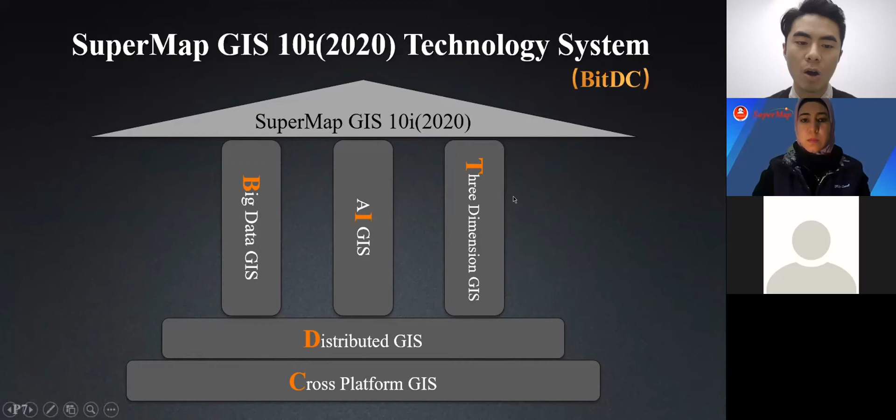We describe our technology as BitDC, which is Big Data GIS, AI GIS, 3D GIS, and distributed and cross-platform GIS. In the future you will learn them one by one, but today let's start with the introduction of SuperMap GIS and its application in civil and environmental engineering.

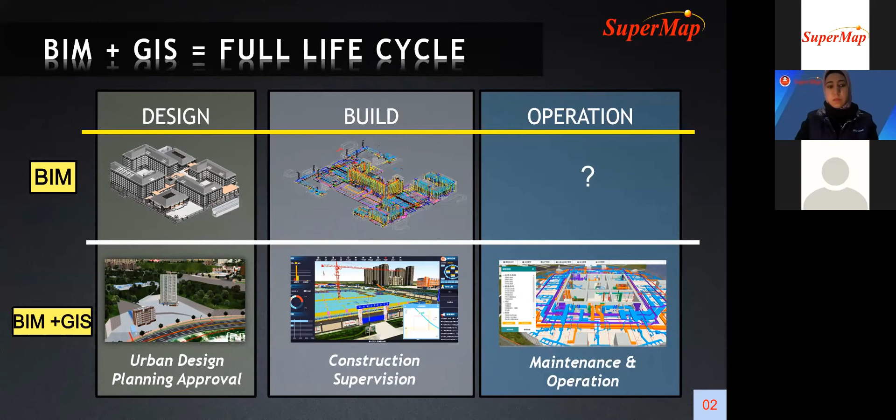One of the important advantages of BIM plus GIS is that in the GIS environment, BIM can merge with multi-source data, such as integrating vector data with BIM, terrain with BIM, oblique photography with BIM, video plus BIM, and street view with BIM.

Also, for other kinds of data like field data, terrain, point cloud, pipeline, and water effect data—all of them in GIS software are in the same format, which is a spatial 3D model, and the format is S3M.

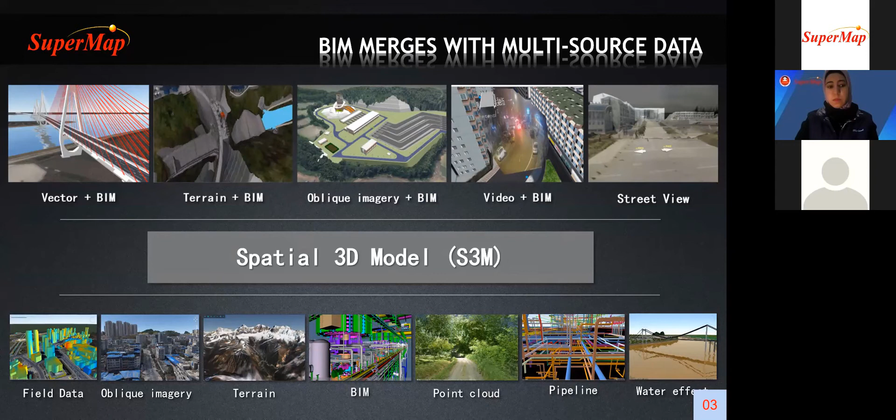GIS can bring other benefits to BIM. For the model, GIS can bring BIM from micro to macro, and also we can focus more on outdoor from indoor.

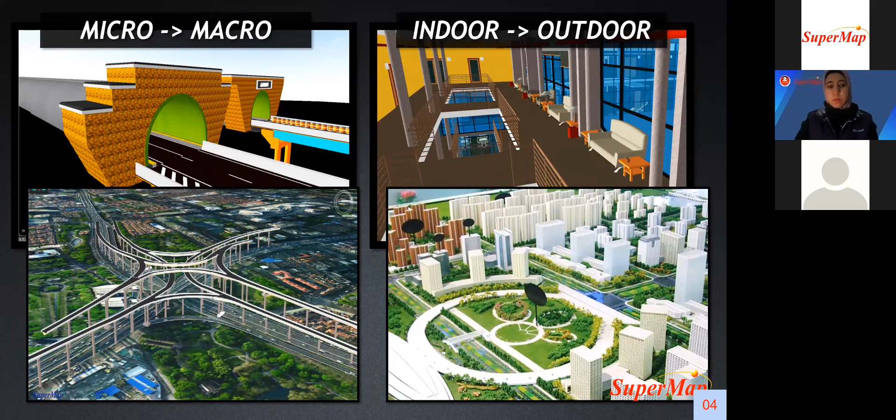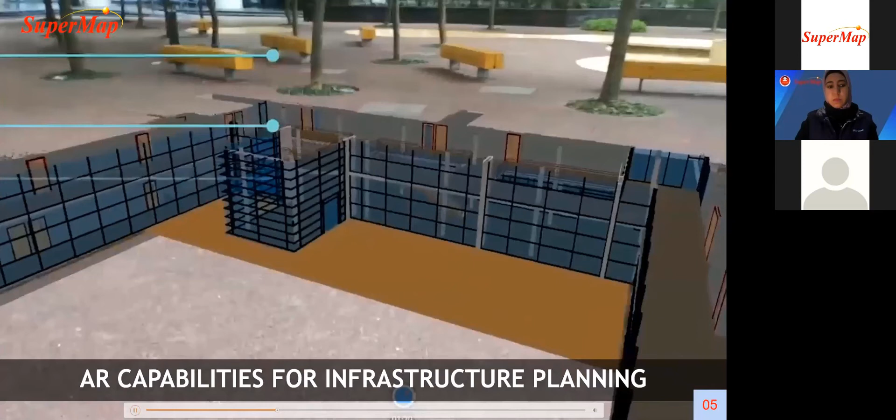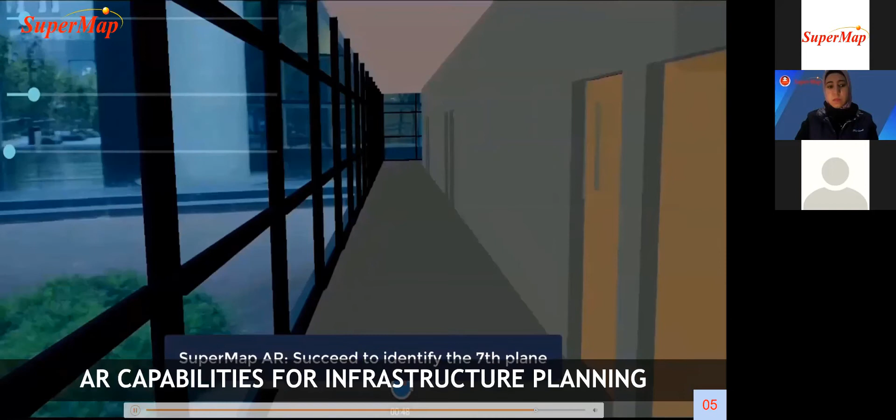There's another application based on BIM and GIS, which is based on AR—that is, AR capabilities for infrastructure planning. Through our mobile camera, we can put the BIM model on the ground or on the table, and we can even go inside the BIM model to take a look at the indoor environment.

For other functions, such as 3D spatial relations, after we input the BIM model into the GIS environment, a lot of functions can be achieved, such as querying objects according to query conditions, which include contain, within, disjoint, intersect, and so on.

Based on one 3D feature, we can do buffer analysis and achieve spatial query analysis, and then get the surrounding features, or other features that have a relationship with our object.

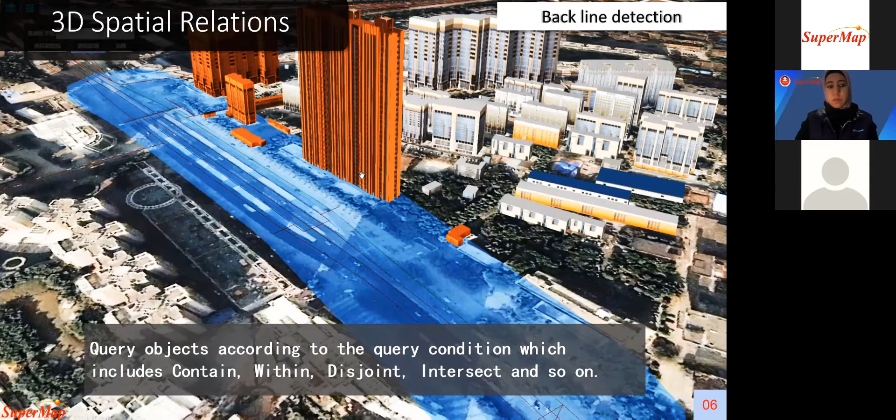Another one is BIM empowering urban planning and construction management. We can put the BIM into a 3D scene and achieve component query, statistical query, and also simulate the construction process.

Because the BIM model is detailed enough, and every component in one BIM building is independent—every door, every wall, every window—we can get all the attributes for every single component. Based on the visibility management function, we can simulate and achieve the construction process simulation function in a GIS environment.

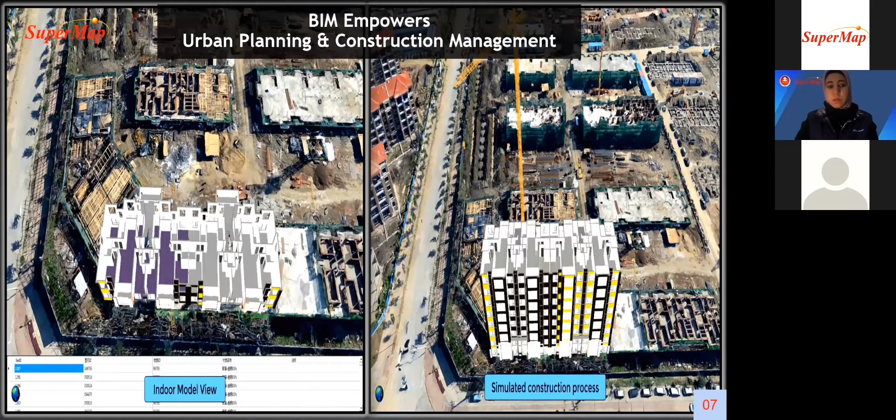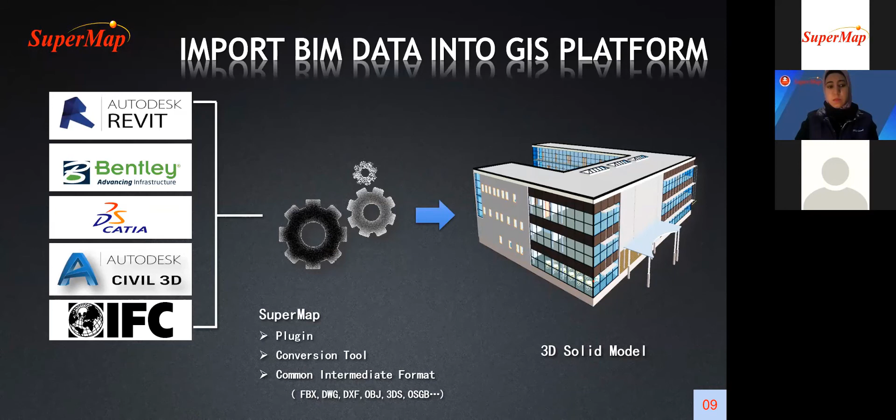The second part of my presentation is smart city and urban planning—how GIS can help smart city and urban planning.

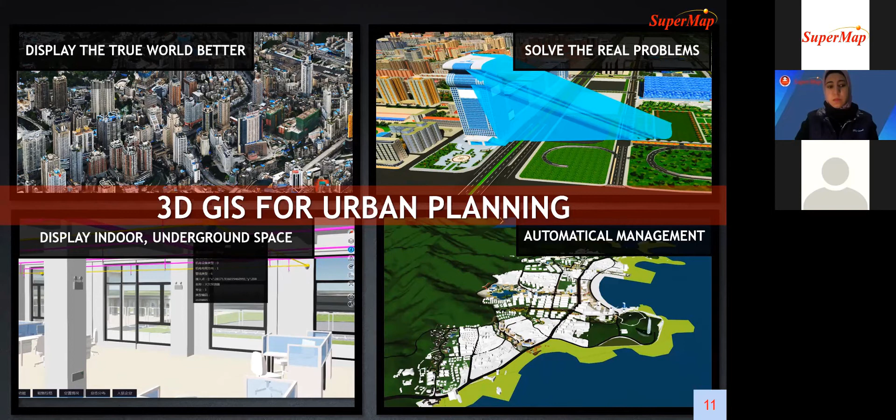3D GIS for urban planning can be used in different aspects, such as displaying the true world better, solving real problems, and displaying indoor and underground space. We can also achieve automatic management. For example, if we want to build a new building in a city, we can draw a 2D vector surface and extend it to let the building stand up. Then we can see the effect after the building is built in the city.

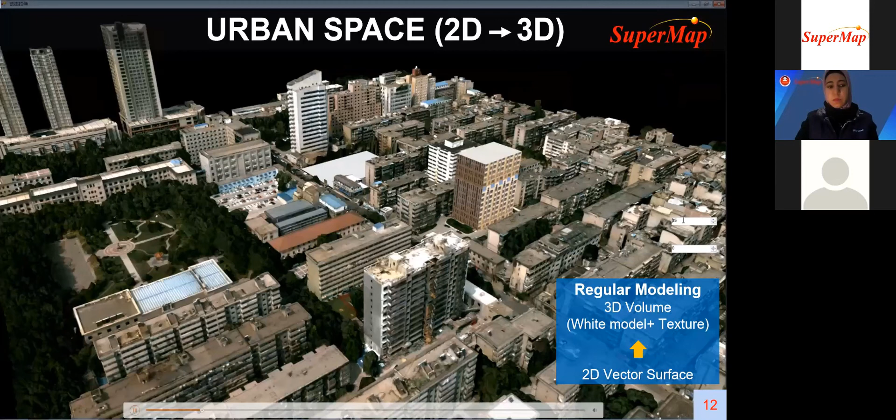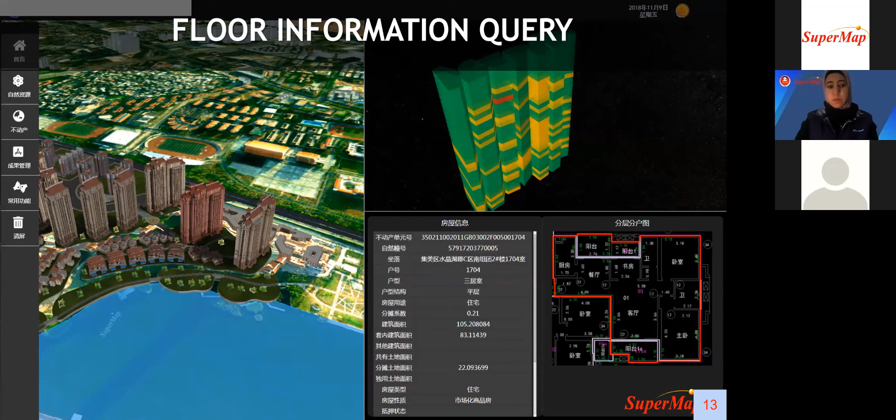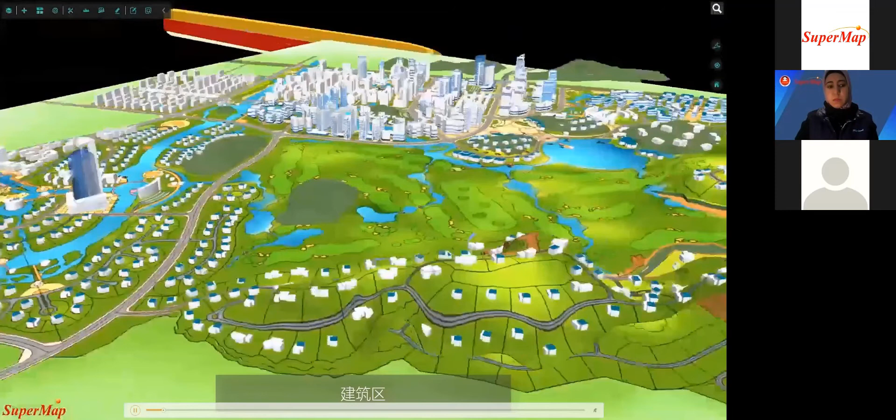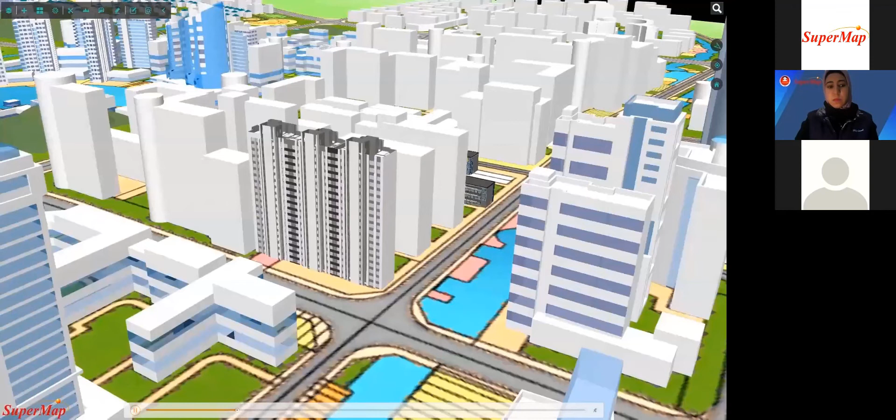There are other functions in urban planning, such as height limit analysis. We can analyze the height of every building to detect which building reaches the height limitation, and also distance analysis, because there are always rules defining the minimum distance between a building and a road. Based on the road, we can define which building is illegal.

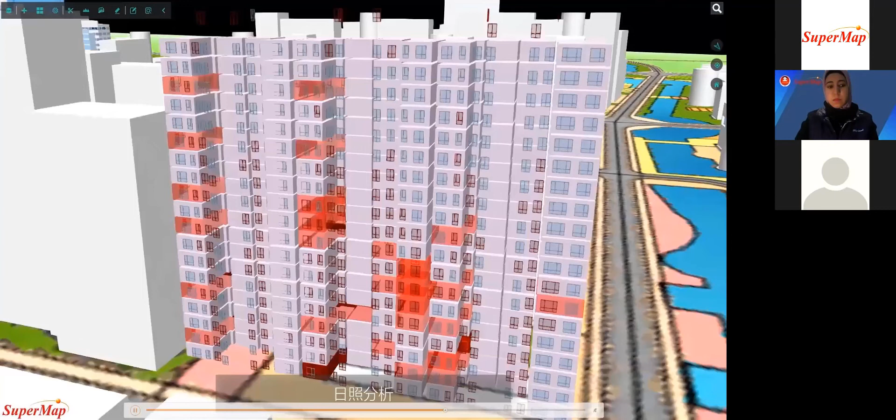This one is showing the viewshed analysis, and this is the sunlight analysis. We can analyze which part of the building gets more sunlight during a whole day, and we can find which unit inside of this building gets the most sunlight.

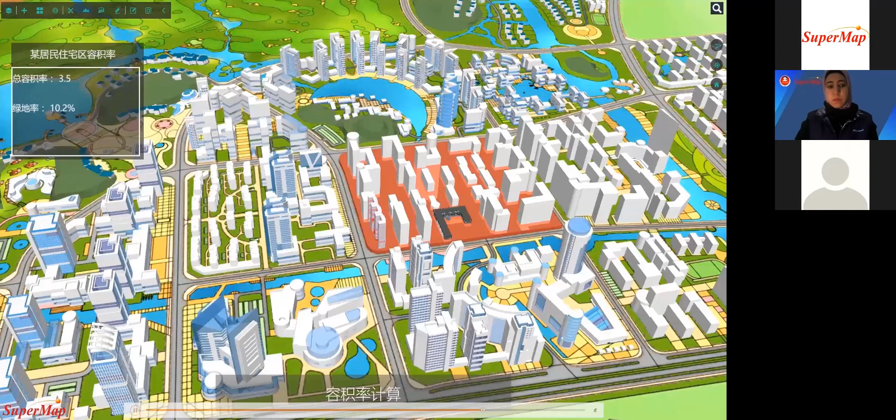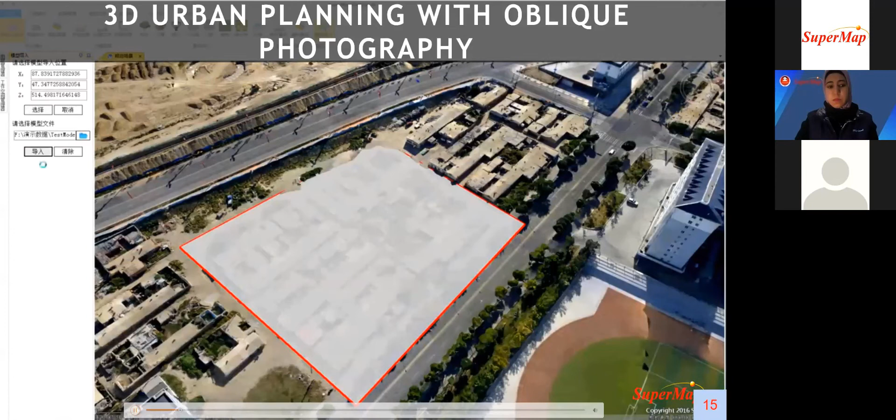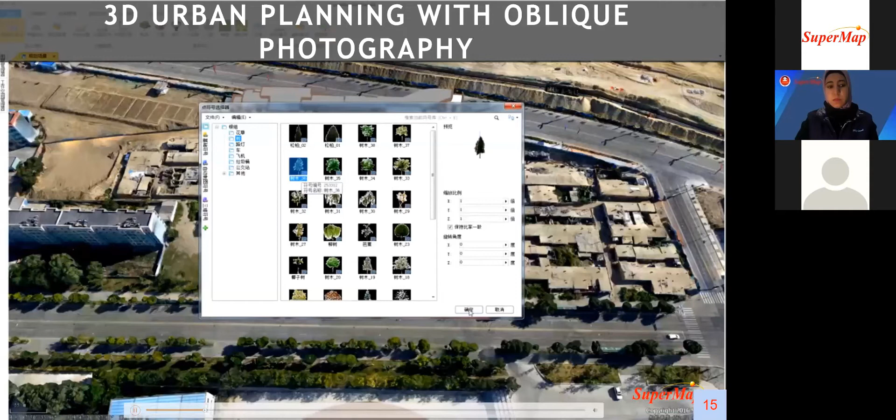Based on the oblique photography module, we can also achieve some functions, such as drawing a polygon to flatten this area of the oblique photogrammetry model, and then import a new model. It may be built by 3ds Max software or even BIM software like Revit, and we can put the new building model in the space.

We can also draw points to add trees and roads, to see the effect if we construct a building like this in this area. How is the effect?

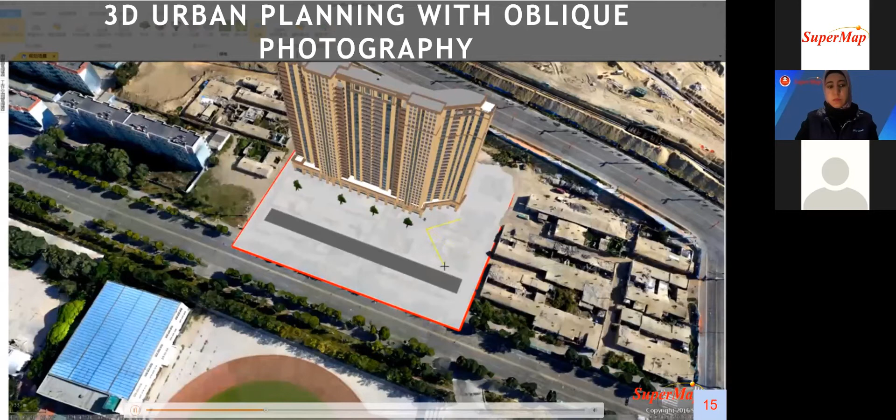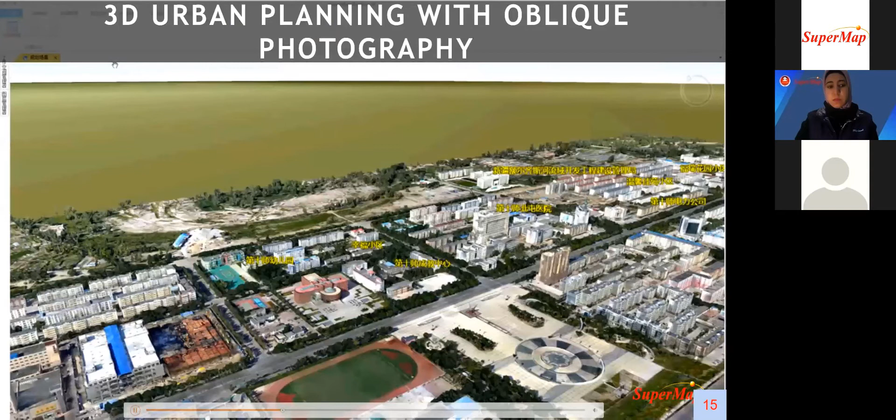Based on the earlier function, we can achieve plan comparison, which means we can place different models in the same place to compare the effect of the two plans.

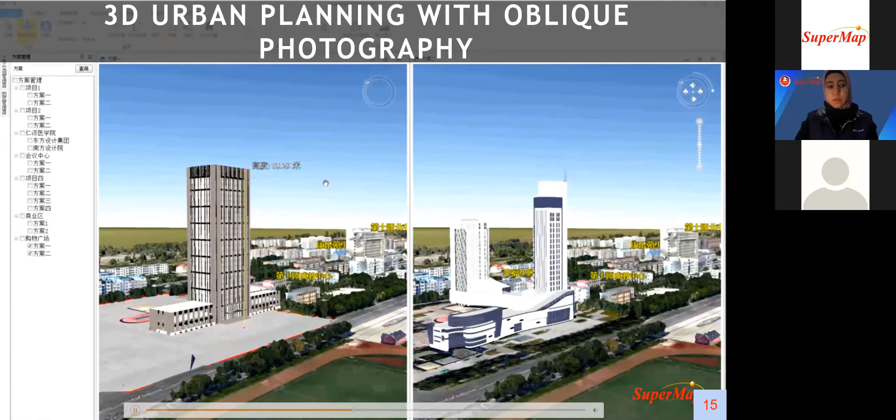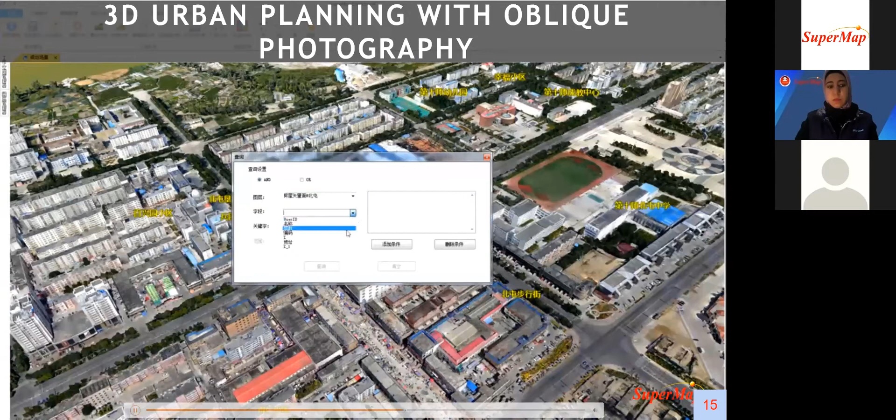We can also do measurements, such as measuring height, and the oblique photography data in the smart city application all have attributes, so we can easily get all the attributes for every building in the city. We can also do spatial queries, such as querying building information based on a condition and getting the location of them.

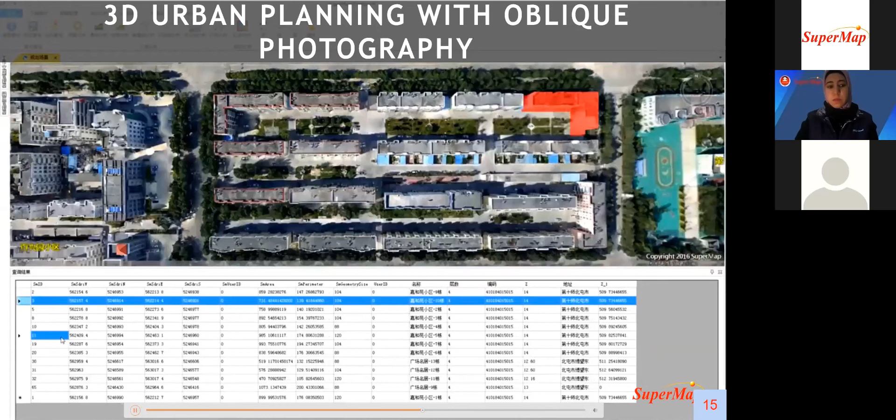We can also use spatial query by drawing a polygon to get all of the information inside of this area.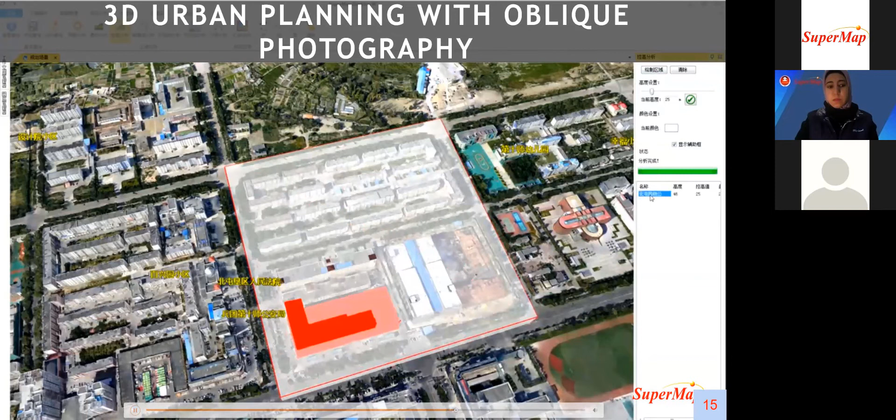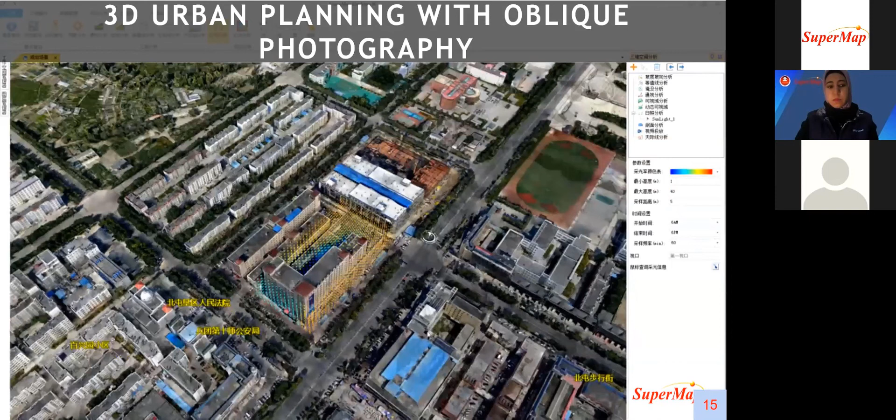For sunlight analysis, there is another application where we can add a lot of sunlight points surrounding this building. The more red the color, the more sunlight that location gets. So it is very intuitive for the user to analyze the sunlight.

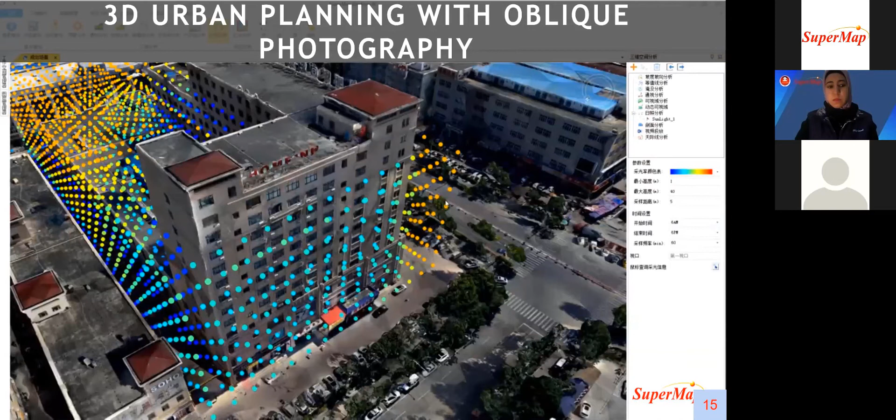This video is showing the visualization effect based on a big volume of oblique photography data. We can see the browsing is very smooth.

Based on the earlier functions, we can build the CIM platform based on the BIM plus GIS engine. CIM is city information modeling. If there is only one building in BIM format, that is a BIM. But if there are multiple buildings all in BIM format, then we can say it is a CIM platform. Based on the CIM platform, we can integrate with IoT or sensors to achieve complex applications for the smart city.

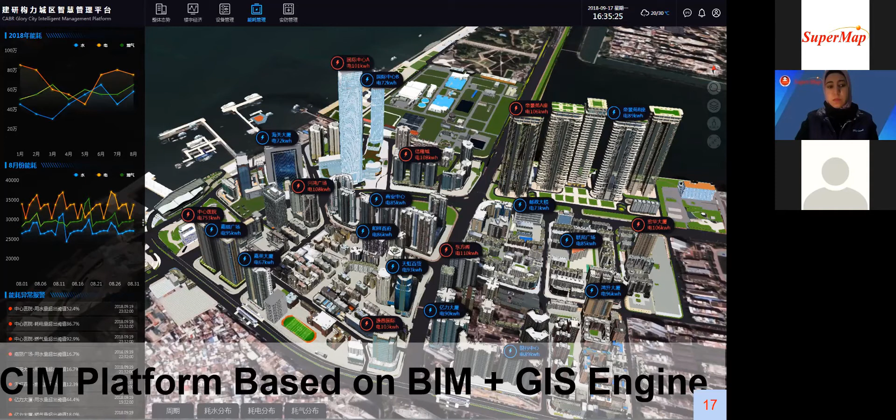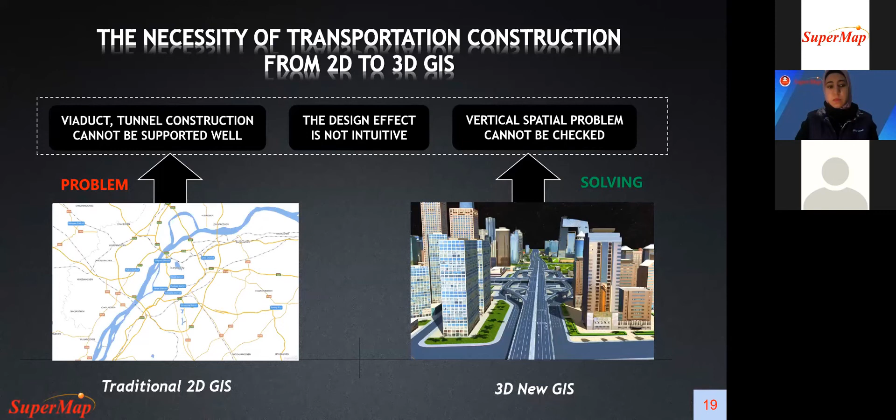The next part of my presentation is 3D technology for transportation. Transportation is very important inside of the city. If we use traditional 2D GIS, there are a lot of problems that cannot be solved, such as viaduct and tunnel construction not being well supported, the design effect not being intuitive, and vertical spatial problems not being checked. So we can use the new generation of 3D GIS to solve the above problems.

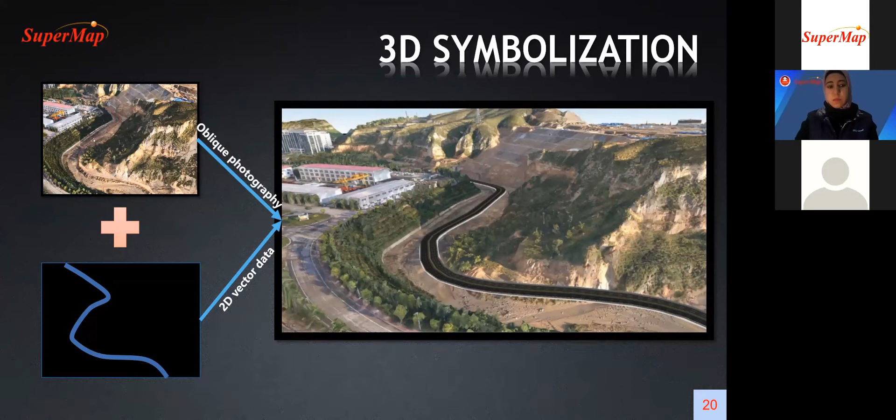In one 3D scene, we can integrate oblique photography data with 2D vector data together to show the building, to show the road, and see how it looks in this environment. Later I will show you the detail of how to create a road like this.

The BIM building is also very useful in transportation. For example, we can integrate 2D and 3D visualization. This road, this flyway, is only the 3D model, and we can overlay it with a 2D map to show the specific location and the surrounding environment of it.

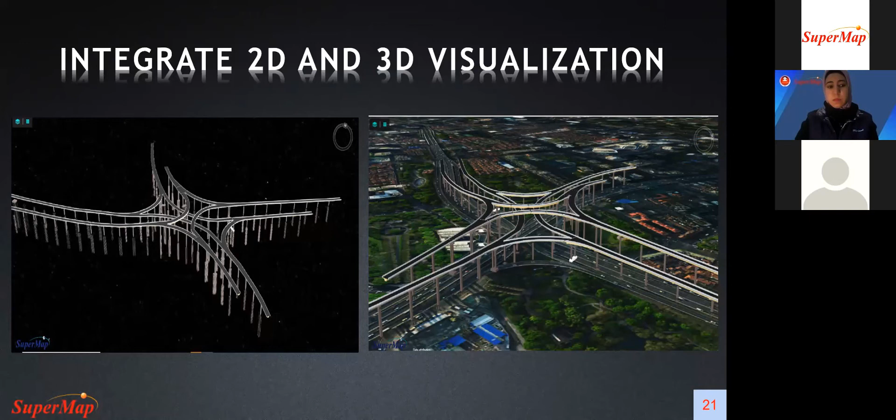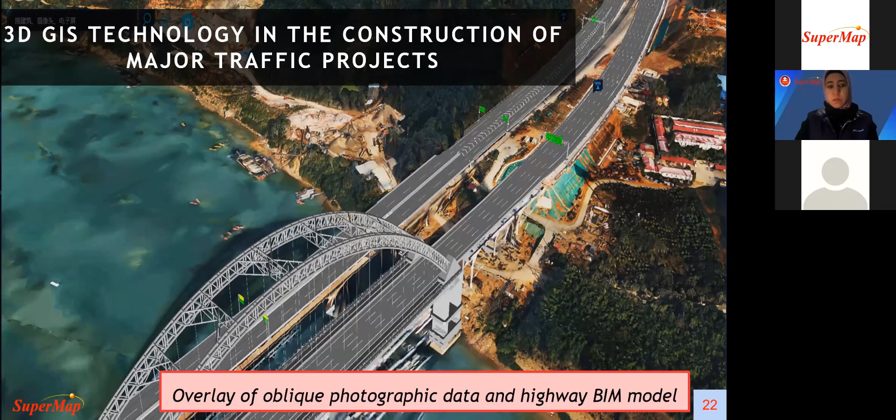3D GIS technology in the construction of major traffic projects is also very important. For example, to construct a bridge, we can overlay the oblique photographic data and highway BIM model together, and also overlay with terrain data. We can even dig the hole based on volume calculation to simulate the road or tunnel crossing the mountain.

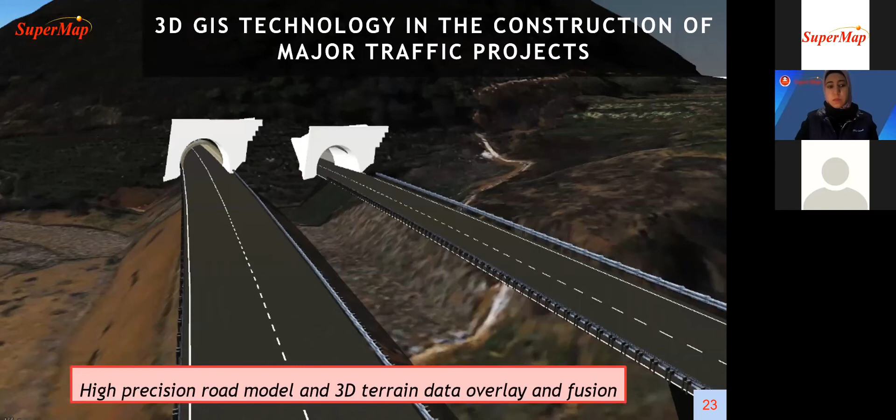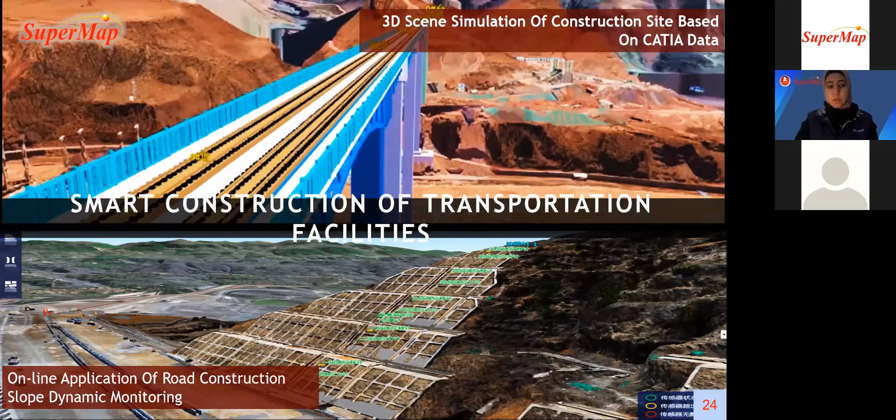There is an example about the smart construction of transportation facilities. We always talk about the digital twin, so the digital twin can also be used in the transportation area, such as for parametric modeling.

We can build a high precision 3D map, and for the real road scene, we can achieve the same scene, the same 3D model, in the 3D GIS environment.

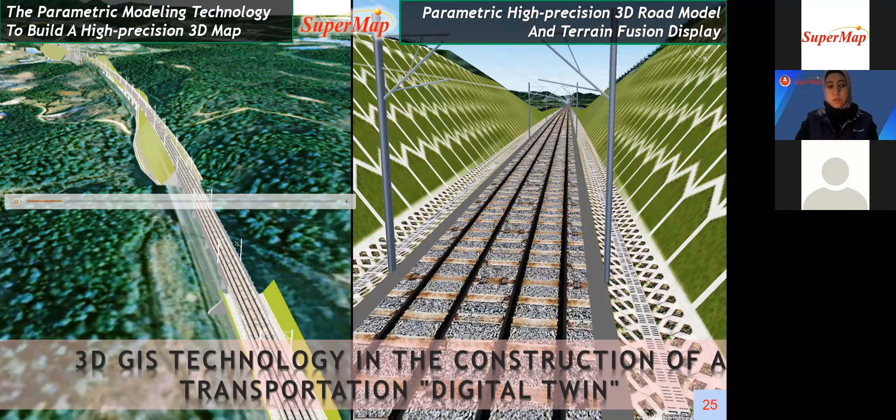There are more cool, advanced visualizations of geographic data, all about transportation. The first one shows the trace of taxis inside the city. The second one shows statistical information about metro stop people. The third one is based on a 3D bar to show the peak hour of transportation, and the last one shows the application of airlines.

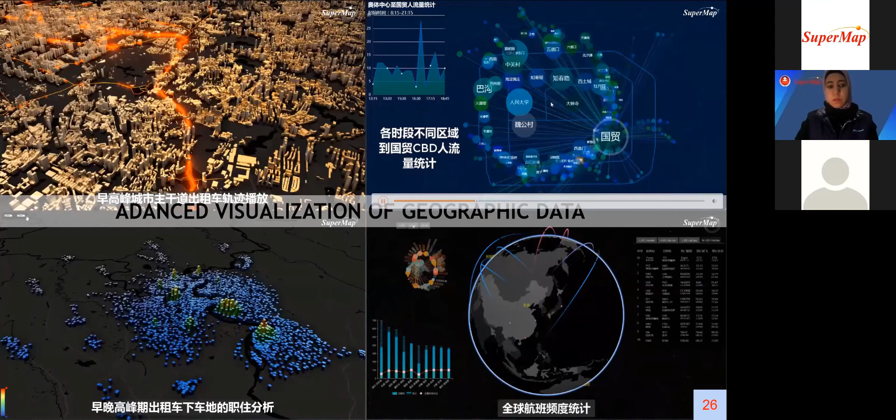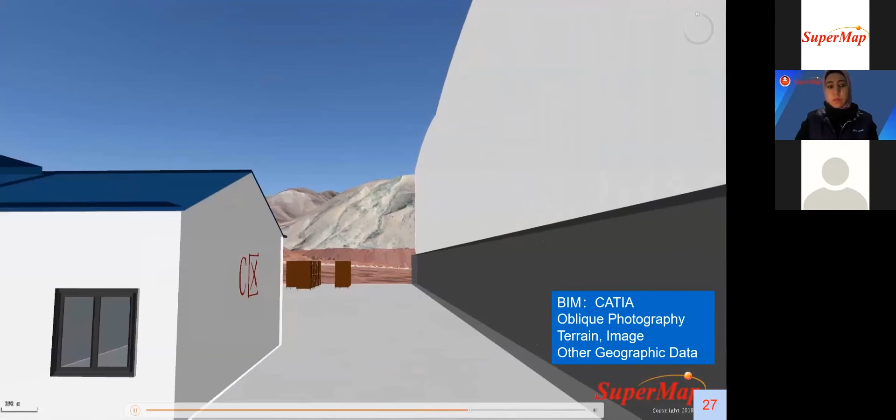This is an example of the construction project of one major traffic project. The BIM data is from CATIA, a very professional software to create the bridge and road model. We overlay the model from CATIA with the surrounding area in the GIS environment.

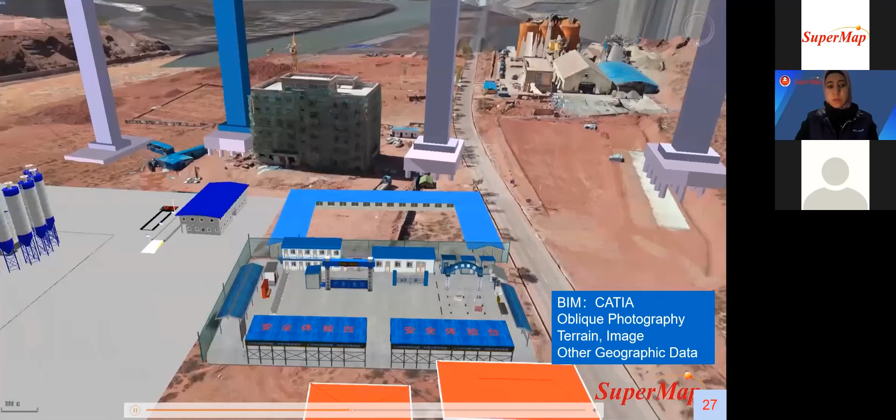The data includes oblique photography, terrain, and image data, and we also integrate it with the model constructed by 3ds Max to create the 3D scene like this.

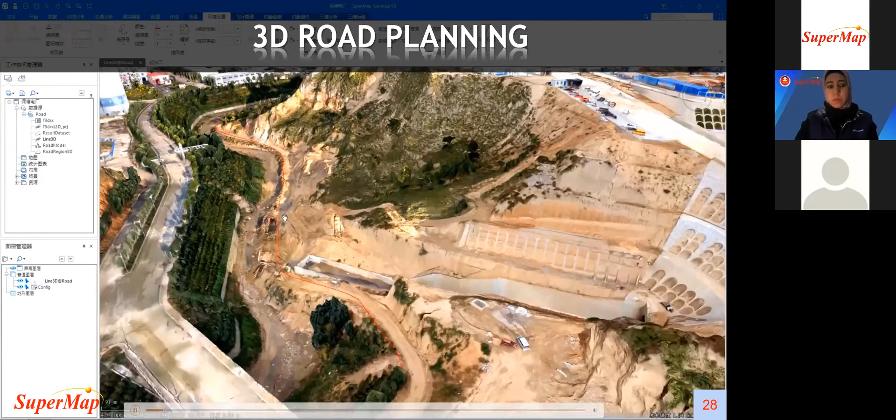This video shows how to create a road in the 3D scene. For example, there is a road line, the central line of a road, and based on this line we can draw a surface, then get a white surface in the scene, and based on that surface, flatten this area of road.

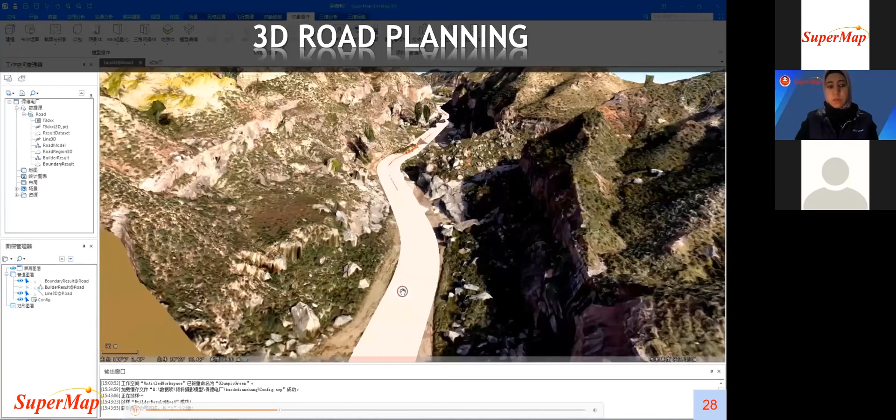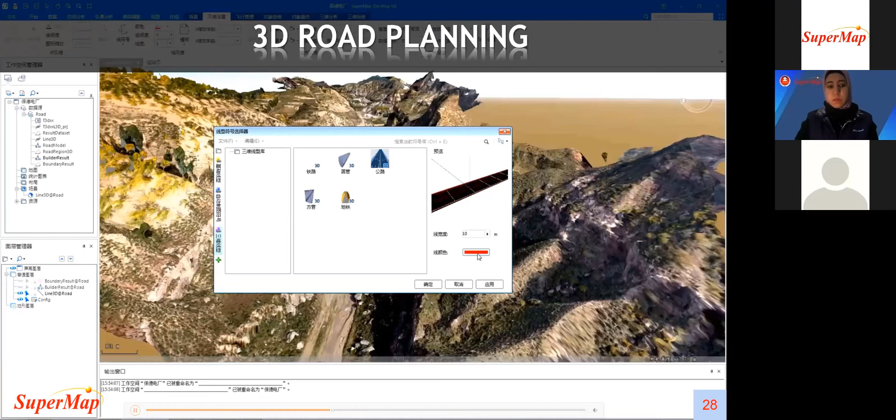After that, we can easily give it a symbol like a railway, and then the railway can be seen inside of this oblique photographic data automatically. We can say the format is pretty good.

For the 3D based digital management system for the life cycle of urban rail transit, if we only need to build a road outside of the city, it's kind of easier. We only need to consider the terrain, the river, and others.

But if we want to construct the subway in a city, there are a lot of other factors to consider, such as the community above the subway path or the school above the subway path. So it is very important if we want to...

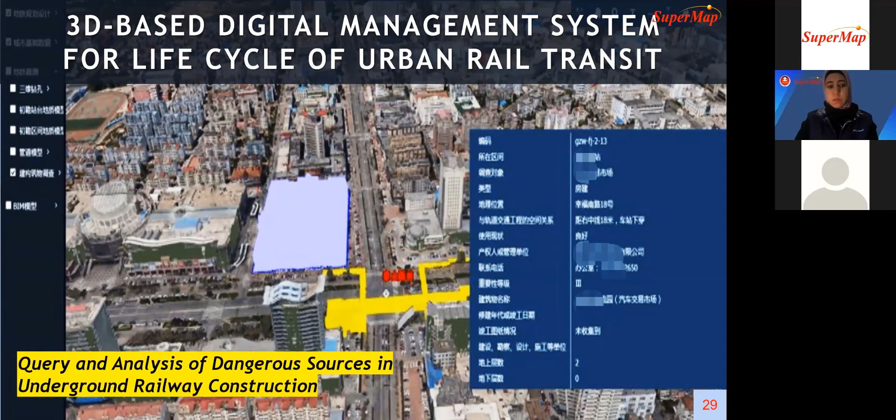It is very important to use GIS software to create a virtual scene identical to the real world. We can rely on many functions like query, statistics, and analysis of dangerous sources in underground railway construction.

Next is about water, that is smart water affair construction. First, there are some key technologies for smart water solutions, like cloud computing, big data, IoT, and the last one is GIS.

Based on those technologies, we can achieve different applications providing a lot of functions, such as collision analysis, pipeline distribution, connectivity checking, shortest route search, pipeline excavation, profile checking, clear distance calculation, and burst simulation. All of these functions are based on the pipeline inside the city.

This is a video showing the effect, the visualization of a complex pipeline. Actually, this is not a real project, but we made this video to show the capability of high density pipeline visualization.

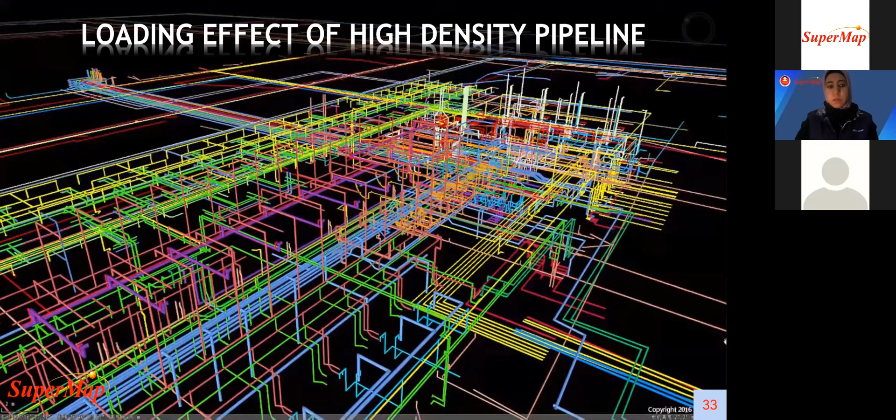We can also create the 3D model of water affair devices to show the factory scene. And for the pipeline inside of the factory, we can achieve the flow effect simulation of liquid in the pipeline, making it very easy for the user to get the whole progress of liquid inside of the pipeline.

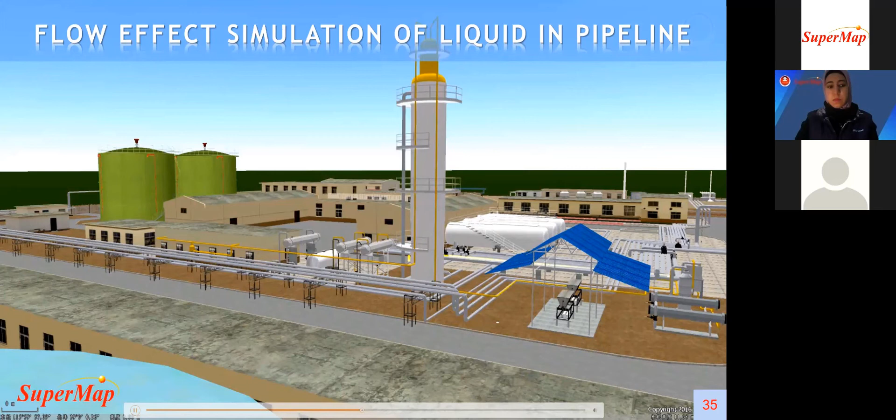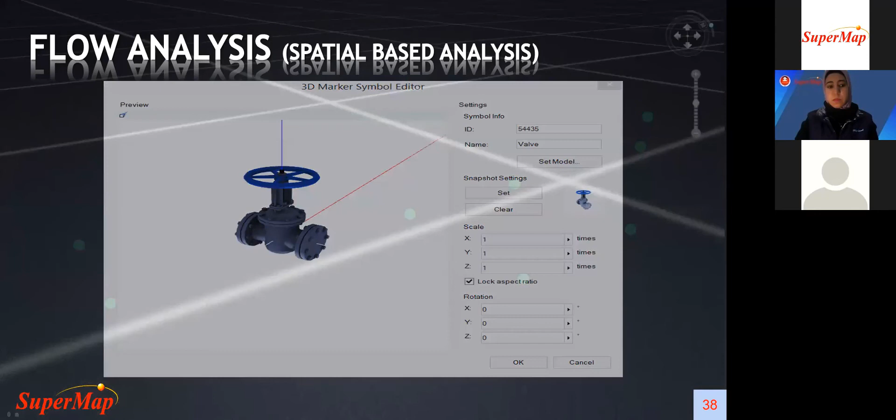Okay, and then there's utility and facility management. For example, for the pipelines, we can easily create the pipeline model in SuperMap GIS software, such as for the pipe point, we can render different types of valves to show them, and then for the lines in the pipeline, we can create the pipeline very easily.

All of them, this kind of pipeline is not created by modeling one by one, but they are all independent models, and with the spatial location point, we just render different symbols for them. Then we can create a pipeline model very easily.

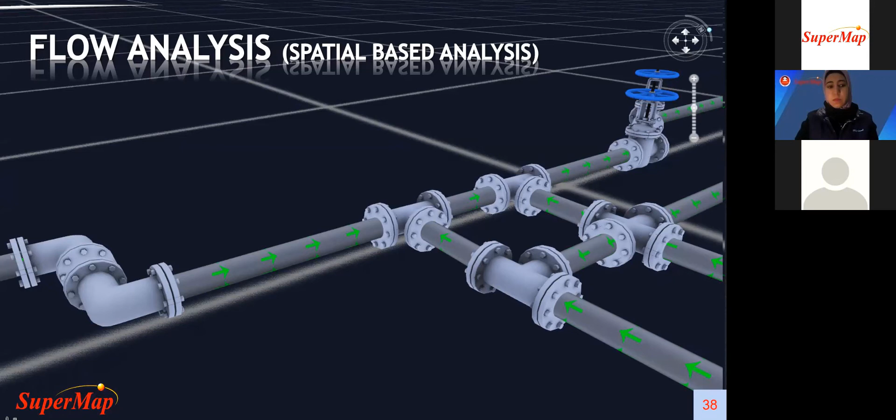And for the expressway facility management based on 3D and BIM, we can, based on the IoT, get the information from sensors and integrate it with the GIS environment.

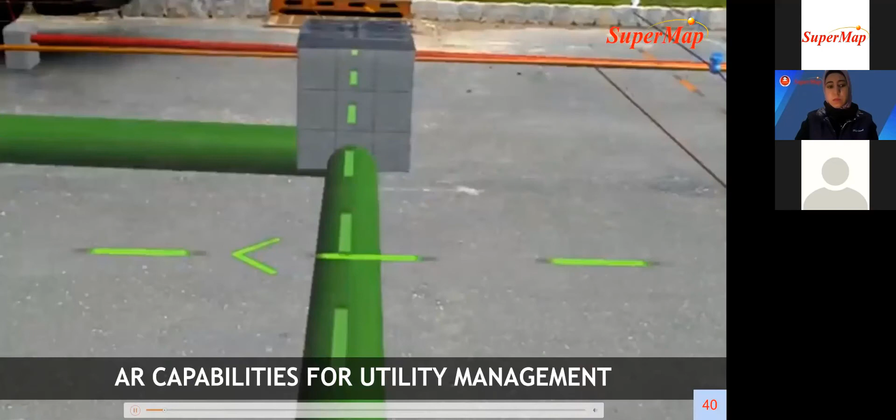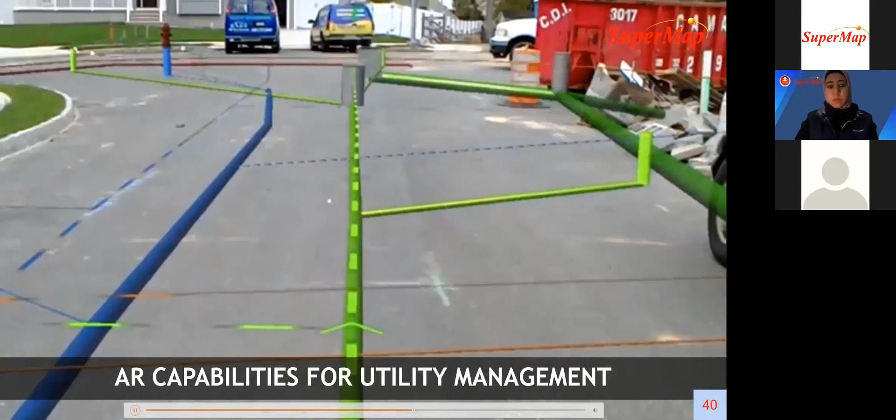And the pipeline also can be used in AR, such as this one showing the AR capability for utility management. Through our mobile camera, we can put the pipeline model and overlay them with the real world. And for every pipeline, every utility, we can do a query to get the attributes of it, which is very helpful for the worker to check the pipelines.

Okay, and the last part of my presentation covers some application cases for the geotechnical solution.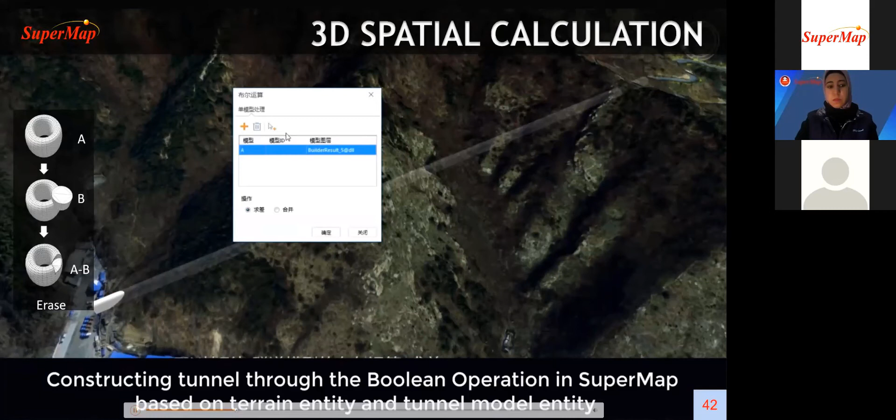The first one is the 3D spatial calculation, showing how, based on the Boolean operation, to dig a hole in terrain data to get the information needed to construct the model of a tunnel.

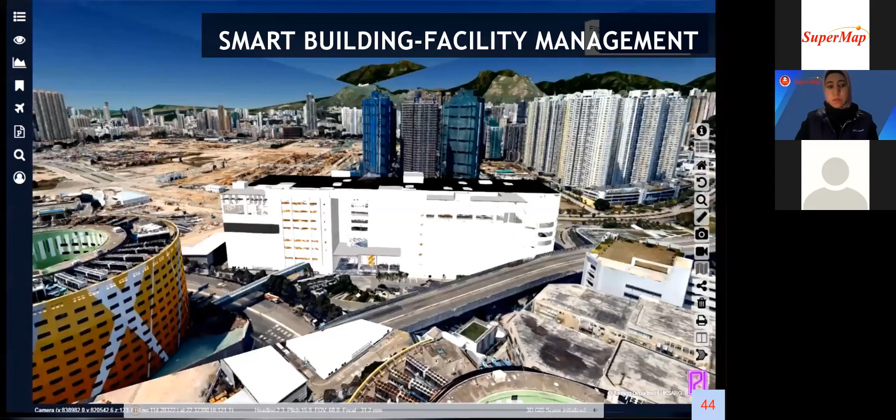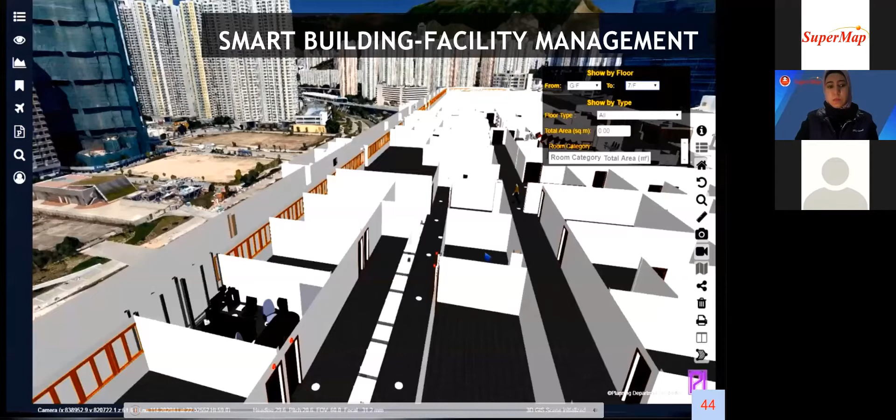There are some cases, such as a project we made in 2018 in Hong Kong. This project is mainly focused on urban planning, and it has multi-source data, like the base map of the scene which is oblique photogrammetry data, and for some key buildings, we use BIM models to show them. It's very easy to overlay the BIM building with the oblique photogrammetry data together to construct the scene.

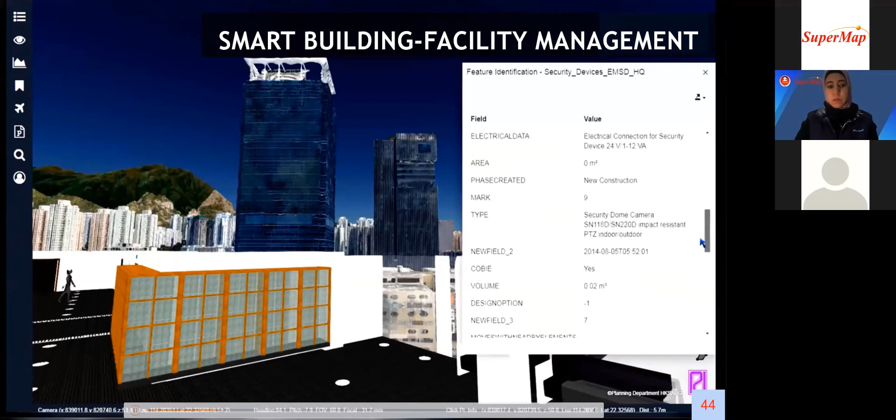And we can switch the floor to get the information of every floor inside of this building, and we can get all of the attributes of the pipelines, the information of the pipelines.

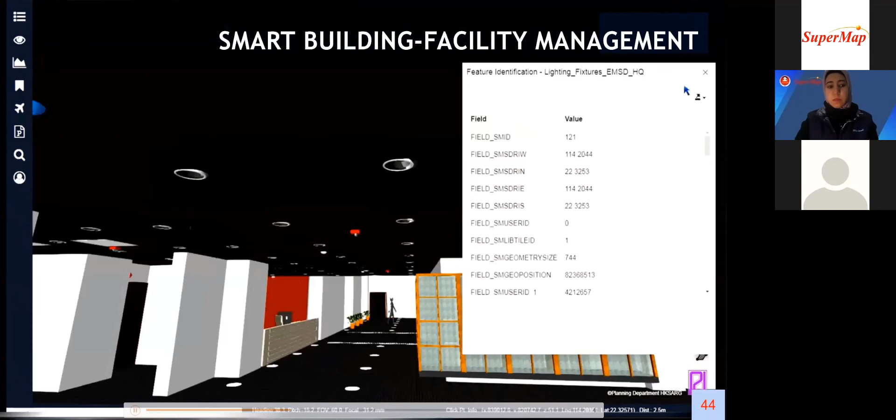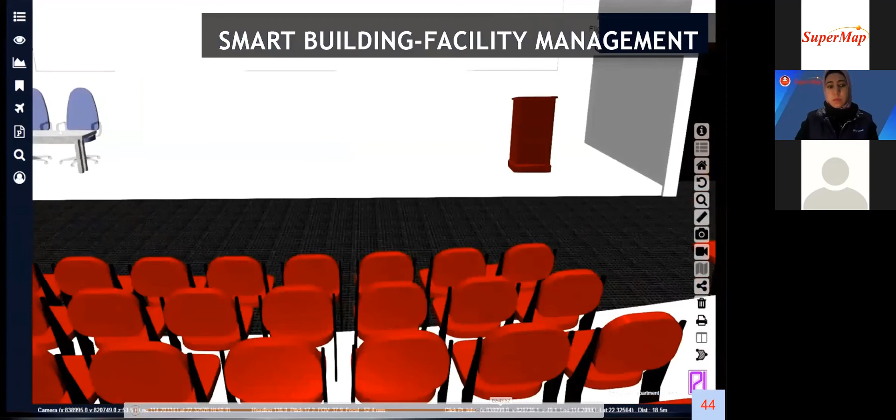Based on it, we can also do some analysis. For example, we can use viewshed analysis to simulate the range of a camera or CCTV camera to get the area which can be captured by this camera.

And this is the indoor flight around this building.

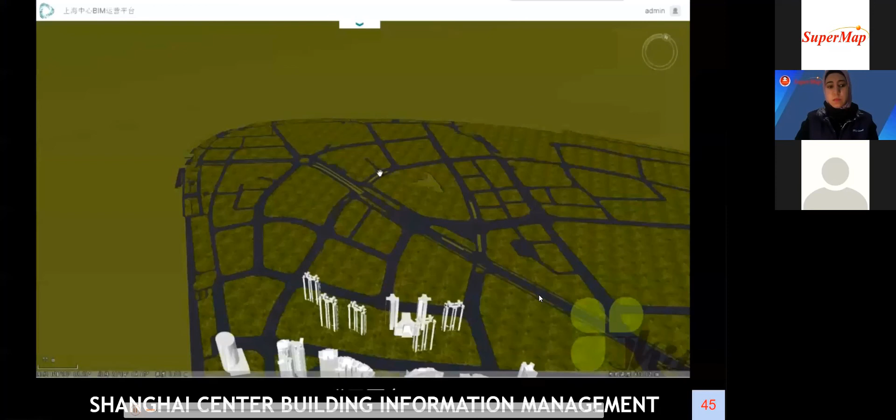Another one is the Shanghai Center Building Information Management. The Shanghai Center is the second highest building all over the world. The highest one is the Dubai Tower, and then the second highest is the Shanghai Center.

Based on it, we achieve the operation and maintenance of this building, like querying all of the information of the facilities inside of the building, such as the pipelines, the door and the wall, and we can also achieve spatial query to get the indoor facility information.

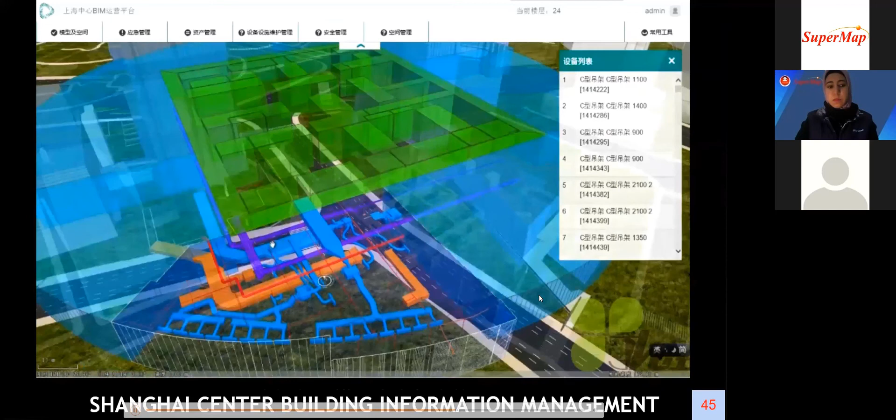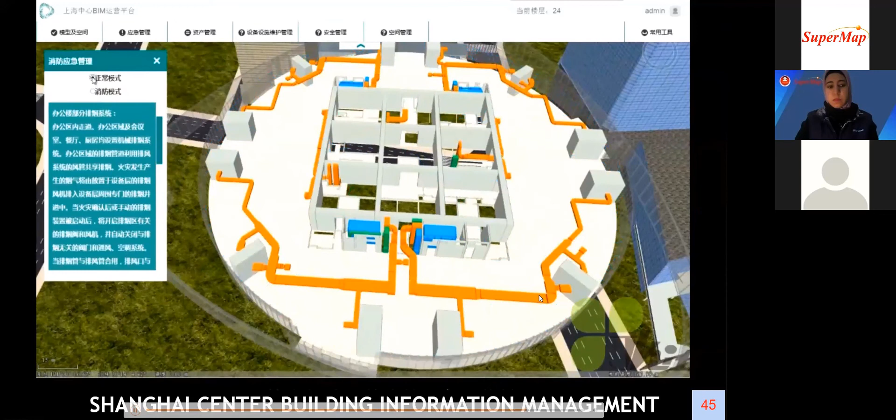This one is showing the function of emergency simulation. We can simulate the emergency situation to get the pre-plan in advance.

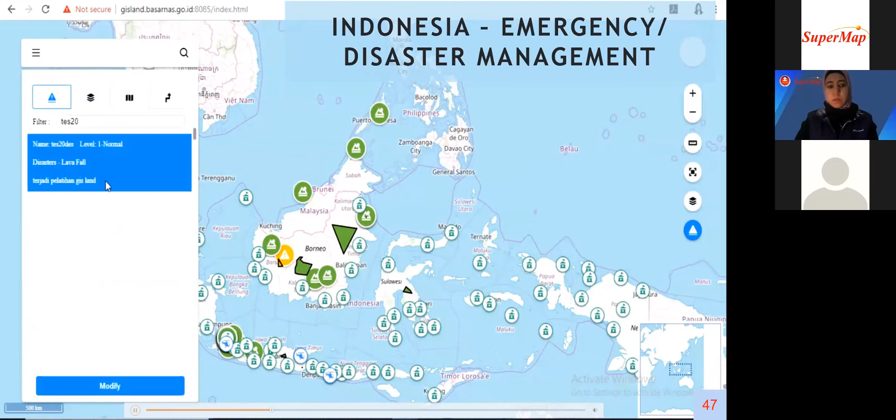Then from the admin side, they can get the event as soon as the user submits it, and then, based on the location, they can find the closest police station or fire station to go on-site to solve the problem.

Another one is the hydropower station. We integrate the BIM model with the terrain data to simulate and monitor the real situation of the hydropower station.

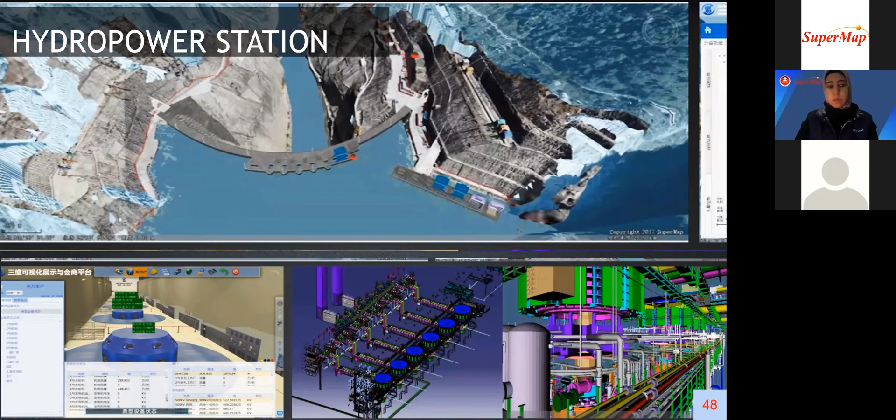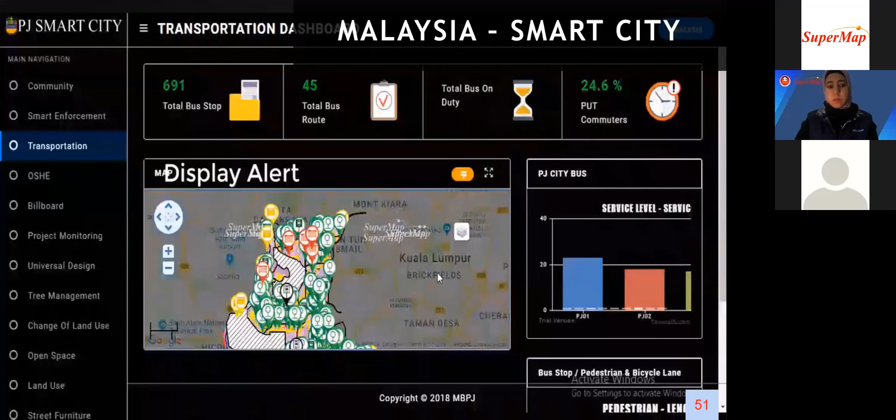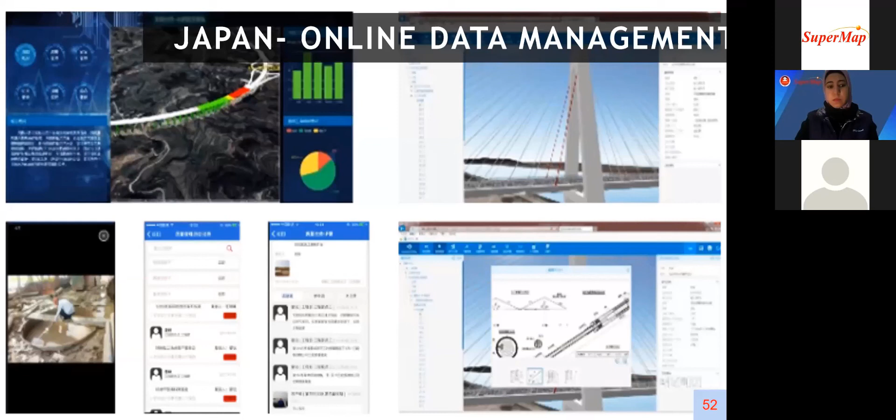All right, thank you everyone. This is all of the content of my presentation. Thank you again.